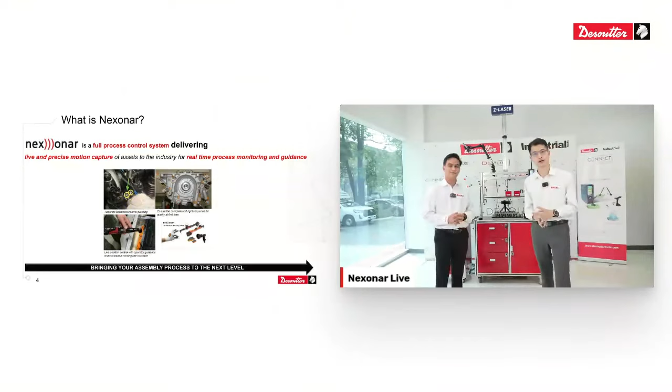Paul, would you like to tell us what Nexonar is all about? I think everyone would like to know what the Nexonar is, so I will explain it as our topic today. The Nexonar is a full process control system.

We use infrared tracking technology to track your tightening point and your tool position. We also have software called Assembly Scout to manage your working sequence, so we can customize your working sequence in your assembly process. The system, the program, and all the cameras integrate together to control your working process. This is the Nexonar product.

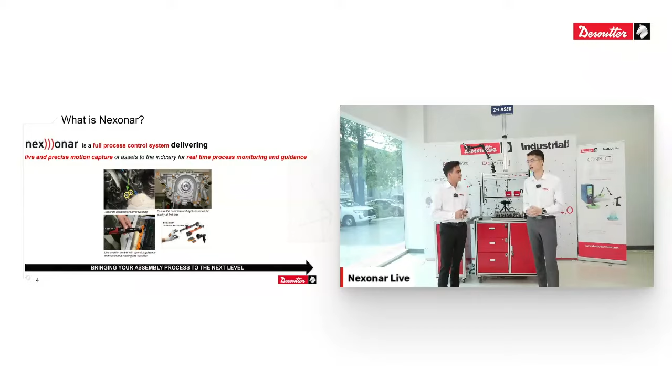As you know, the Nexonar product can help improve the assembly line. So could you tell me what benefits it can bring to your assembly process?

Yes, sure. If you want to talk about the benefit, maybe I would rephrase the question as why we need a positioning system in the first place. We need this positioning system because of market demand, it's from the customer's demand, it's from your demand. With a positioning system, you control everything from the beginning of your production with a full error-proofing system.

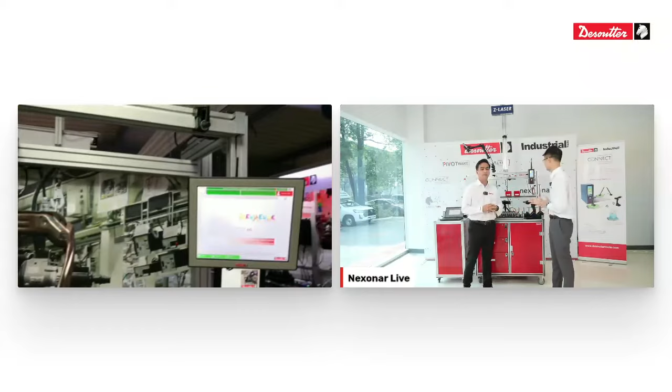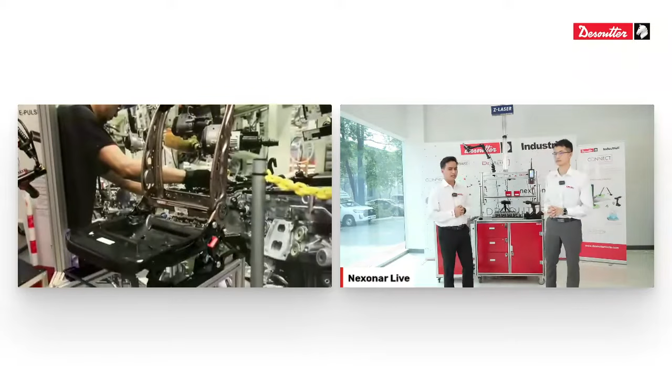At the end of your production line, there will be reduced errors, which means reduced rework. When there's a reduction in rework, you can save a lot of time and a lot of cost as well.

One of the most important benefits of Nexonar is that there are no cables. As you can see here, the camera, the tools, and the laser all communicate through a Wi-Fi system. With less cable, you can expect a very safe working environment for your operator.

Apart from that, you don't need any other accessories like positioning arms or encoders. These kinds of accessories can sometimes be challenging to install in your production line because it's a very customized solution. Without encoders, you can expect less maintenance in your production.

Paul, we keep talking about Nexonar, but actually I still don't really get it. Maybe you can explain to us what the components of the Nexonar are. I would like to explain what the Nexonar product consists of, all the accessories. I will explain them one by one.

The first and very important component is called the live motion capture sensor.

It will detect your tightening point. It will detect your positioning of your assembly tool. And so far we can detect on the moving action, and also that we can detect on the fixing part as well.

Okay, and the next part is what's called the tracker. The tracker we will attach in the fixing part and also the moving part. We can adapt with many applications, so it's really easy to adapt with the operator, to attach on the glove of your operator to matching and keep the part, bring the part from the box, and the tightening on the application.

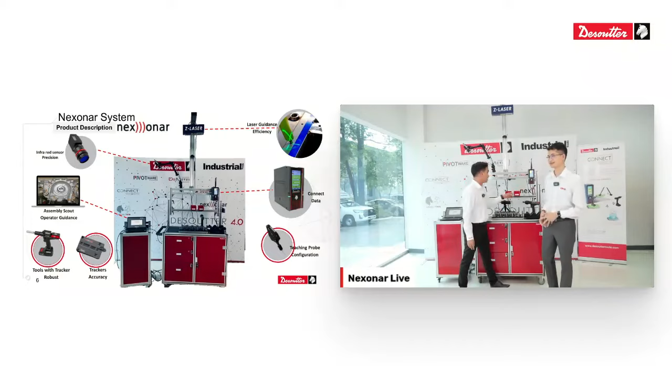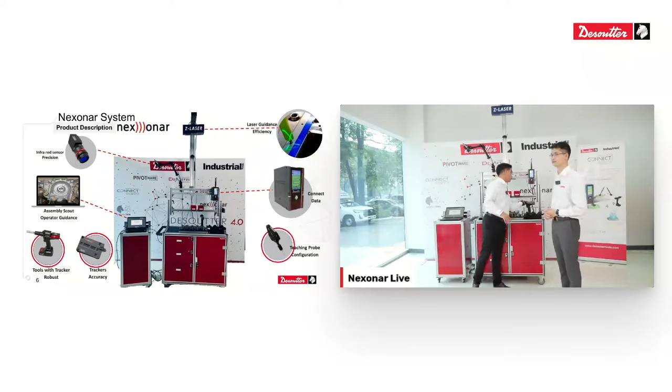And then the second thing is actually we have this small controller CPU here. We call it a Connect Industrial Smart Hub. So for the Connect Industrial Smart Hub, actually it can transfer the tightening data straight to your Connect. So whenever you do the tightening, all the torque, the angle, the speed, the operation procedure will be transferred live into this Connect Smart Hub.

And then so Paul maybe already mentioned about the tracker here. We also have the tracker that can integrate with the tool as well. So this one is very easy, you can just plug and place the tracker. So when you plug and place the tracker, this will be detected.

And then finally, we also have the teaching probe. So this teaching probe is actually one of the important components of the Nexonar. Why is it? Because with this teaching probe, you can do the teaching position, the initial setting for the Nexonar very easily, which we will show you now.

So let's start to go with the production. We will show you some live demo first on how to do the teaching. So as Yunus mentioned, this function of the teaching probe, we have to choose the system where is our working page with the software. So let's start how the teaching probe is working.

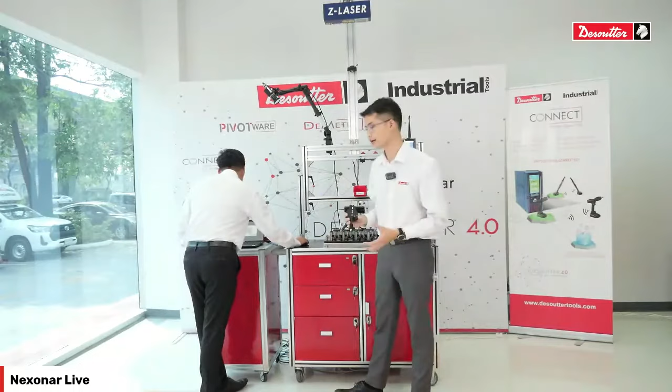Okay, so we will start with using the teaching probe to teach the position. So first, before we start, we need to study about the reference point. So on the left side of your screen here, if you can see from the assembly scout, so we have reference number 1, 2, and reference number 3.

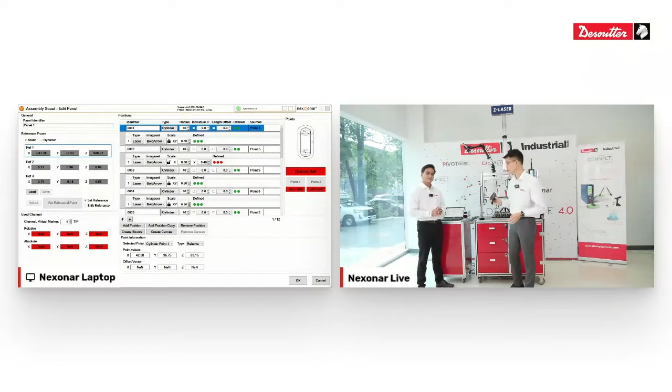So maybe Paul can quickly show us how we do it. Every time before we start the working, we have to create the reference point in your working space, totally with 3 points. But we are using this teaching probe to teach the software where we are working. So we will show on the screen, and everyone can see the parameter which is running.

So you can see this turn green here, meaning that the teaching probe is already inside coverage of the camera. So I just simply click set reference point. And then we can go to reference number 2. So after we move the teaching probe, the parameter in the bottom with the green color will be moving. That means the teaching probe is brought into the working area of the sensor.

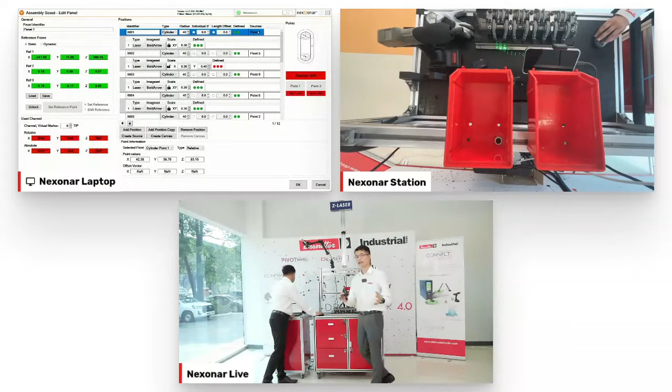And the final teaching point. So this is the last point, which we would like to make for the reference point. Okay, so this is done, how we have to teach the working space before we start to make the assembly process.

And I would like to show some sample for the tightening point, which we have to teach all of the tightening points before we start the sequence. So on the first point, which we would like to mention. So point number 1, is it this one? Yes, the point number 1.

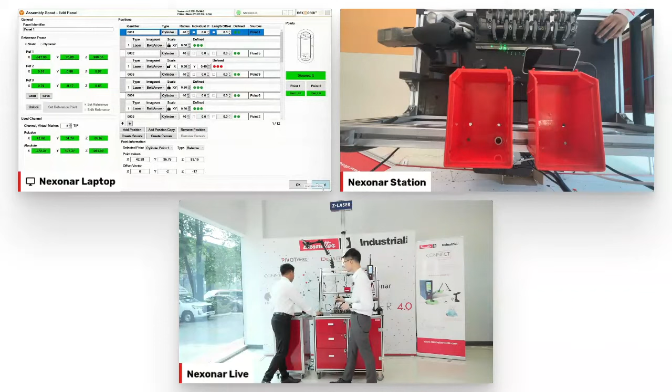So after everyone sees the indicator with the distance, that means the probe was in the center point, because before the event we already taught the system where point number 1 is, where point number 2 is. So the distance will be within tolerance. For every tightening point, we have to teach. So now we've gone through the teaching process, which is the initial setting and configuration.

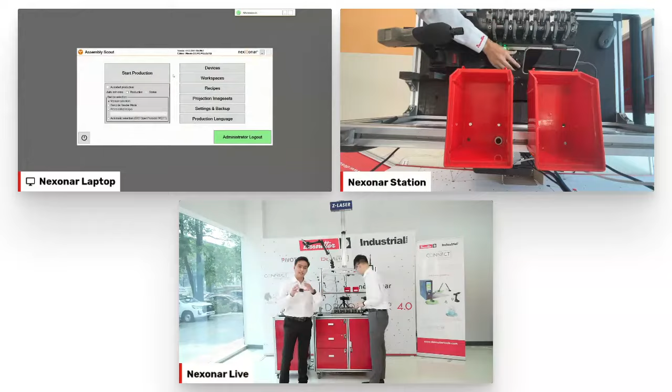So next, we would like to show how the production works with the Nexonar system. As Paul mentioned before, we have 2 types of main applications using the Nexonar. First is for pick and place using this tracker that you attach to your glove, and second is the tightening operation using Nexonar, which uses the tool integrated with the tracker system.

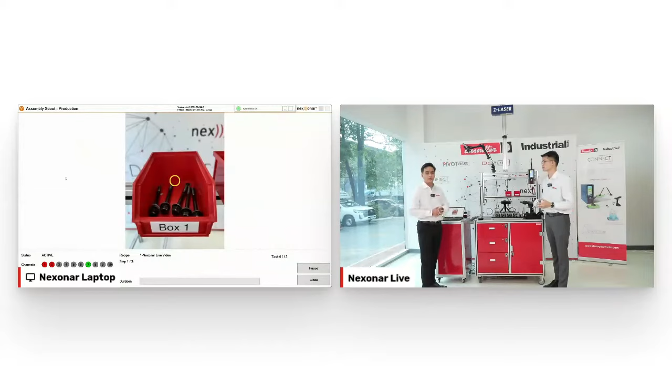So let me show you in the Assembly Scout software. We can select the program we already have configured. And here, you can see that this is actually the operator guidance. It shows you to pick up the screw from box number 1, which Paul will further demonstrate.

As our scenario today, we are preparing to pick up the part from box number 1, and after that we bring the part from box number 2, and after that we will do tightening on the assembly points, totally 10 points.

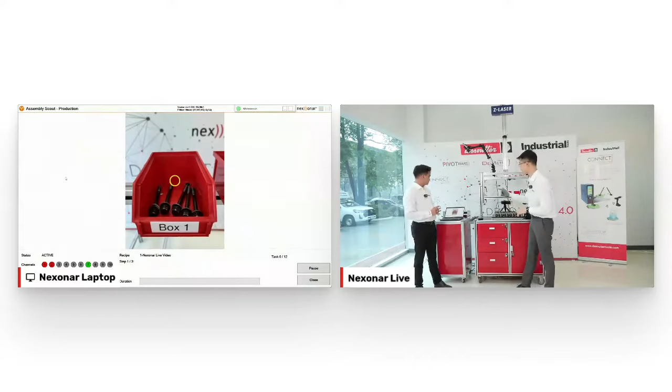So I will follow the operator panel. The first point, we have to bring the part from box number 1, and at the same time everyone can see the laser guidance will guide to box number 1. It's very easy to follow the working sequence by the operator panel. So I will pick up the part from box number 1.

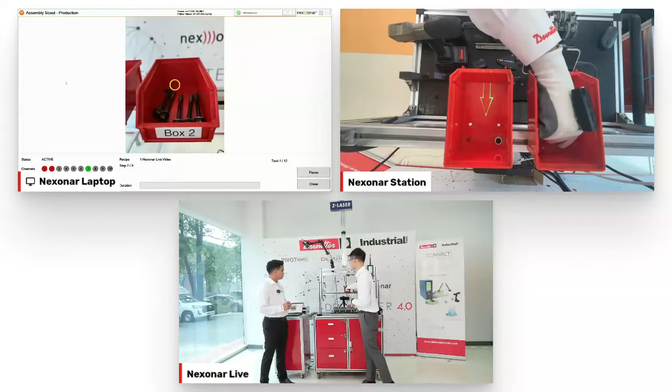And after that, the system says we have to pick up the part from box number 2. Now the laser guidance has moved to box number 2 already. So we can see it's very easy to follow the working sequence. So I will pick up the part from box number 2.

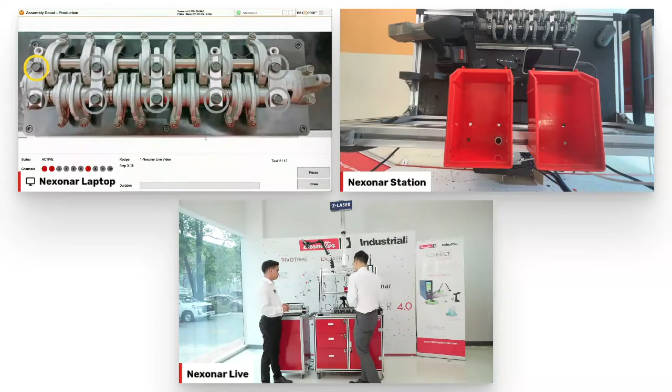After that, we move to the tightening point. As we create today, it's totally 10 points. We can see the yellow indicator on the tightening point at the first point. At the same time, the working laser is now on the first point, and everyone can see the arrow pointing to the first point. So it's very easy for the operator to follow the tightening sequence as well, even in a complex sequence.

As you can see, if we are out of position, the tool will not work. That means we can guarantee every tightening screw will be tightened at the correct point. So I will start from point number 1. Now the tool is in position, and the indicator will change to blue color, meaning the tool will work.

So if you can see from the Assembly Scout here, the ring is showing that the tool is now currently in position. When we start the tightening, after we finish, it will change to green and move to the next position.

Now we move to point number 3. In case we are out of position, the tool cannot work. So I will try point number 3. As everyone can see, when the tool is not in position the indicator stays a certain color, and when it changes to blue color, it guides the operator that the tool is now in the right position. At the same time, we can see the laser guidance as well on the assembly point.

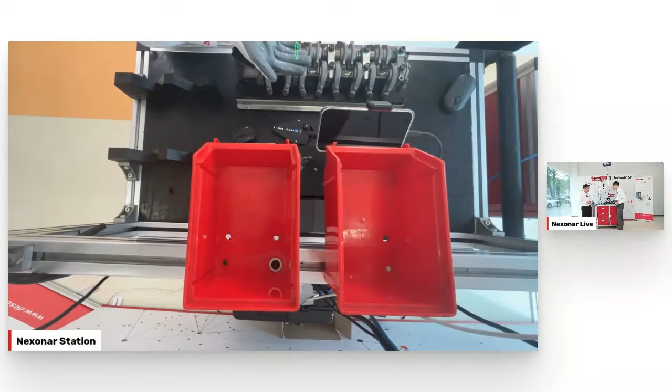Also, after we finish, we can set the laser guidance to mark every screw that we've already completed tightening. So as everyone can see, now we are marking on the head of the screw, checking each point, so we can confirm the tightening was done for each screw already.

Also, as you can see, when he's doing the tightening, all the data is actually being captured live to the control system, which is the Connect Smart Hub here.

And we have one more box to go. So that is really easy for your operator to speed up their work, because they don't have to think about what is the next step and what is the sequence for the tightening.

So imagine if you have new products coming in, a new model, a new facelift. We don't need to spend time training the operator, because we can just do the programming to set which parts you need to tighten. It is a forced sequence.

Okay, so basically we've already done a brief demonstration of our Nexonar. It's just a part of the Nexonar positioning system. Now we would like to take some scenarios or examples from real life.

So Paul, now we can see that the parts are considered small. And why is it small? Because one camera can cover the whole working area. So what if in an application where the parts are very big, how do we customize? How do we solve it? Okay, that is a very good question.

In case you have a big application or a compact application, we can bring the system by using the camera to integrate into the Nexonar system. One camera can support up to 24 trackers. That's a lot. That means if we have a big part or a compact part, we can use multiple cameras, installed in each position, integrated into the system.

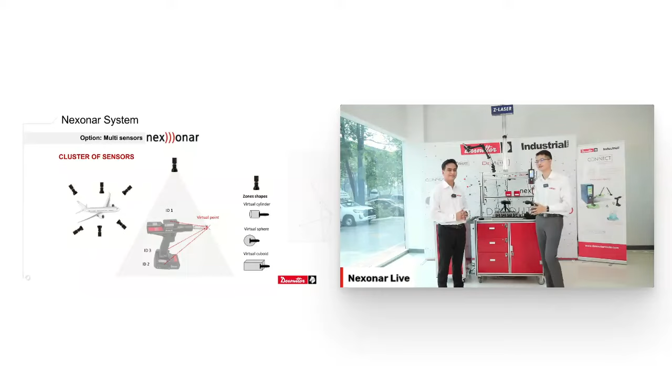Okay, so in the second scenario, I'd like to ask you, Paul, what if these parts... Now we are using one tool, maybe because the torque requirement is the same across the parts. But what if we need two different tools in one location? How do we solve it?

Okay, in this case, we can create different scenarios and also customize the working sequence in the Assembly Scout program. So for the Assembly Scout program, we customize your working steps. We can add different tool types, and also integrate for the operator to work in the same application.

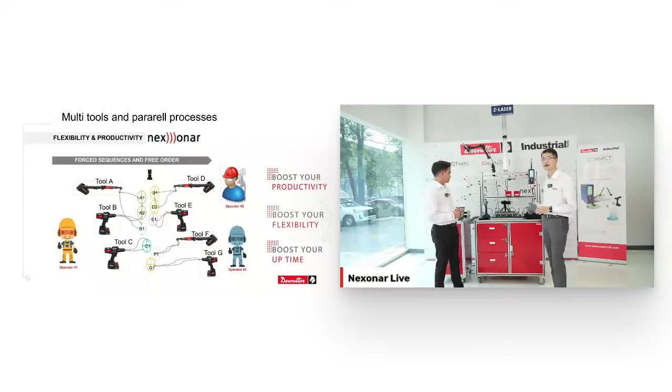So we can tell you that for every customized solution, every challenge you guys have, you can just consult us, as we can come up with many customized solutions.